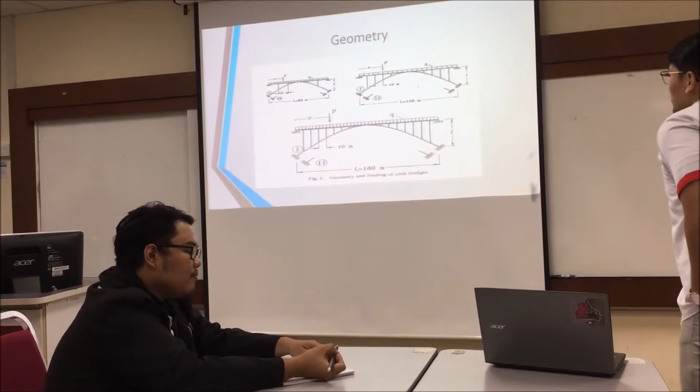Thank you. So I'm going to proceed with the geometry. The notation and loading of the arch bridge structural model considered are illustrated in this figure. The bridge is symmetric and is composed of three major structures: the deck girder, arch rib, and the vertical post.

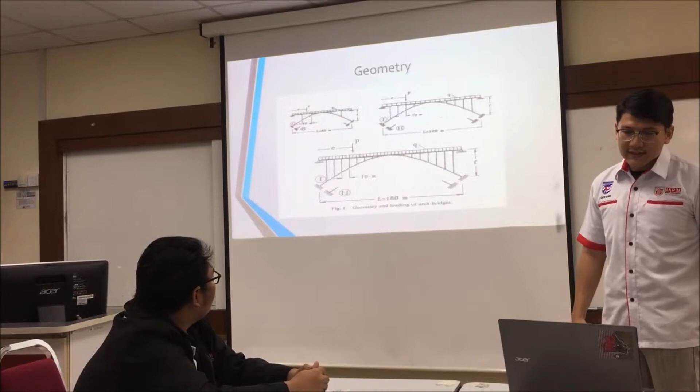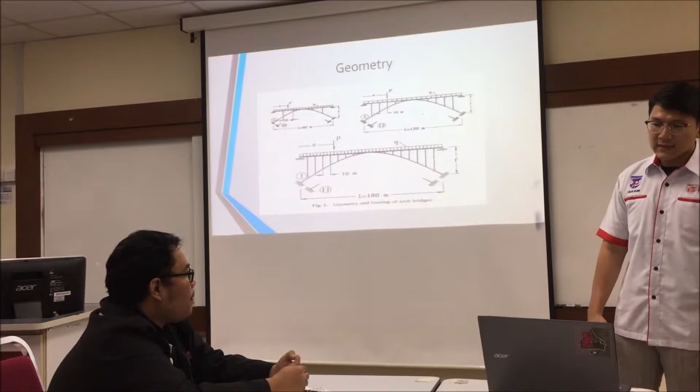The deck girder has a constant double-T cross section. The arch rib has a circular or parabolic axial configuration and a constant box-shaped cross section. The rib is pinned in case 1 or fixed in case 2. At the abutment, the deck girder and the arch rib are rigidly connected at the crown, thus there are no axial forces on the deck. The posts are located every 10 meters and pinned with constant cross section.

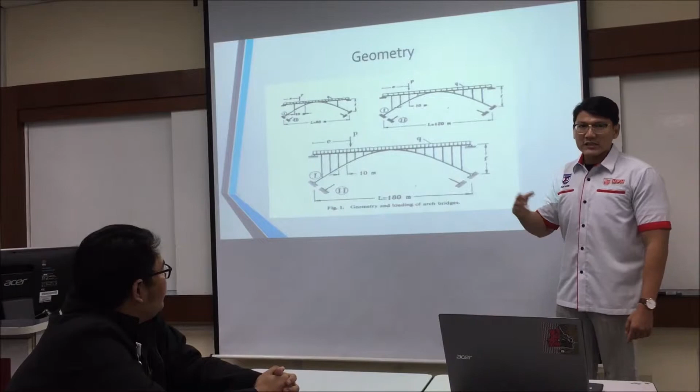As you can see, this is the deck girder, this one is the vertical post, and this one is the arch. One of my engineers will explain how and when the buckling will happen. So without further ado, we'll invite my assistant engineer.

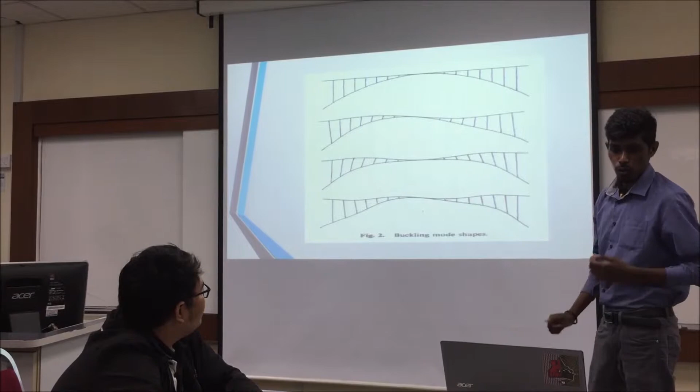Thank you, sir. So let's see - this is based on the mathematical formulation of section 2 and its computer implementation. The critical loads for various values of the considered parameter are computed. The two lowest critical loads and their corresponding mode shapes are found, which we can see.

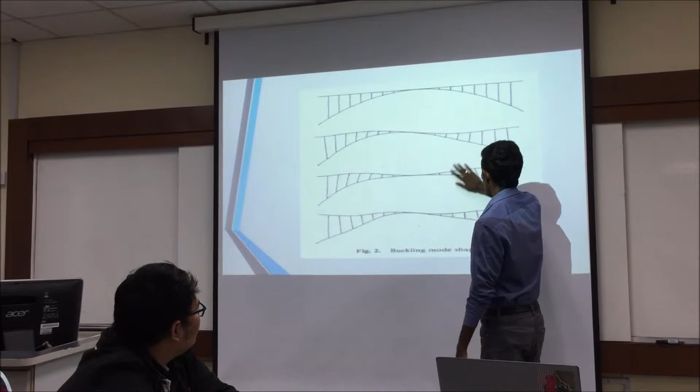This one is the undeflected bridge. Then here, all this is because of the buckling effect. So what is buckling? I'm going to explain it after this.

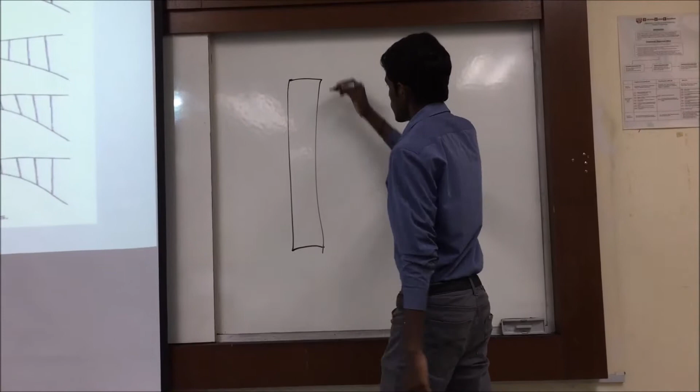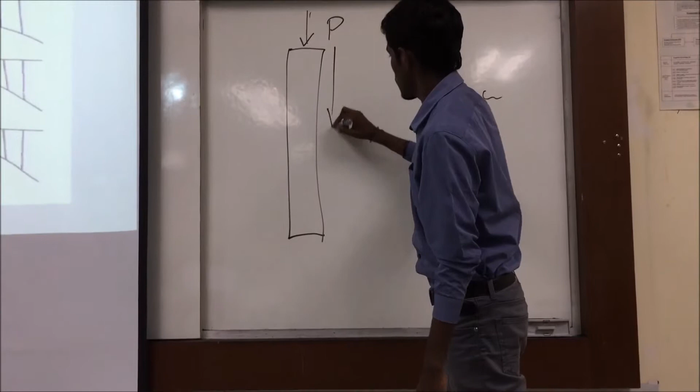First, this is an example of a structure. Then you can see here there's one load, which is axial load. Buckling happens because of a load experienced by the structure parallel to the structure - this is called axial force. Then the buckling effect brings the shape like this.

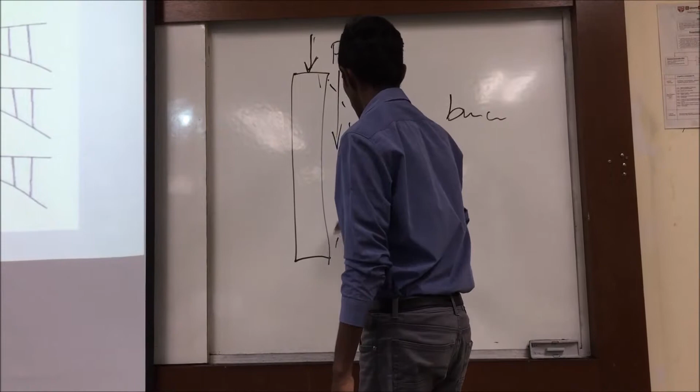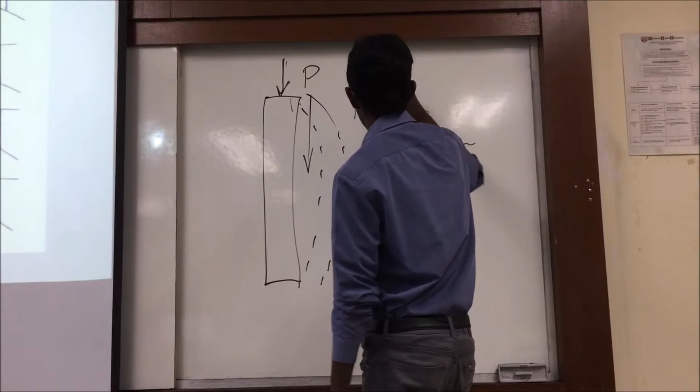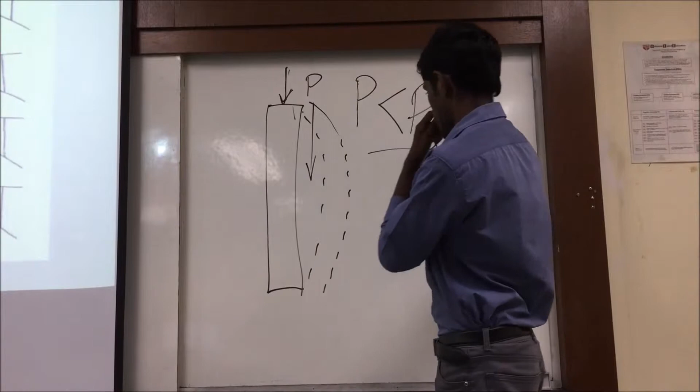So for our structure to be stable, our axial force shouldn't be more than the P critical. We have a formula to calculate this: P critical equals pi squared times E times I, over L squared, where E is Young's modulus and I is moment of inertia.

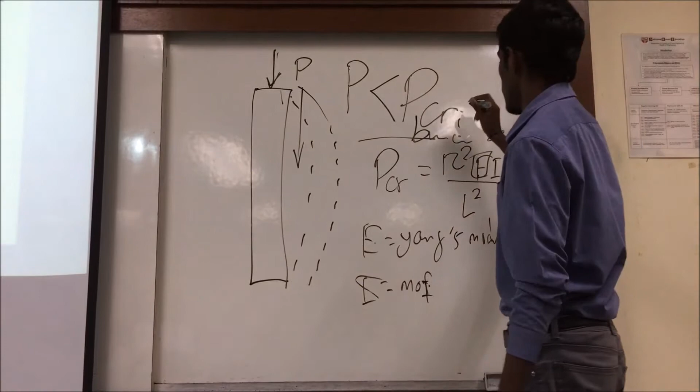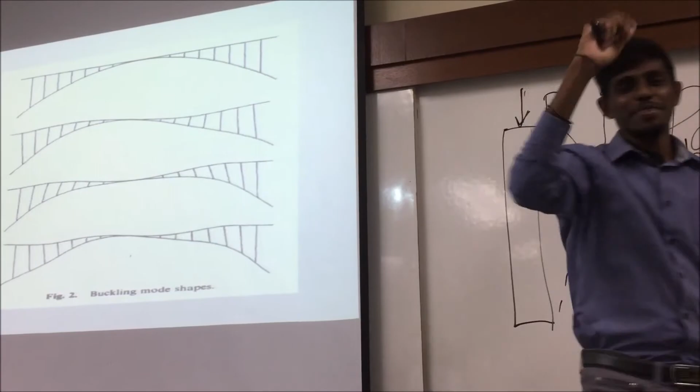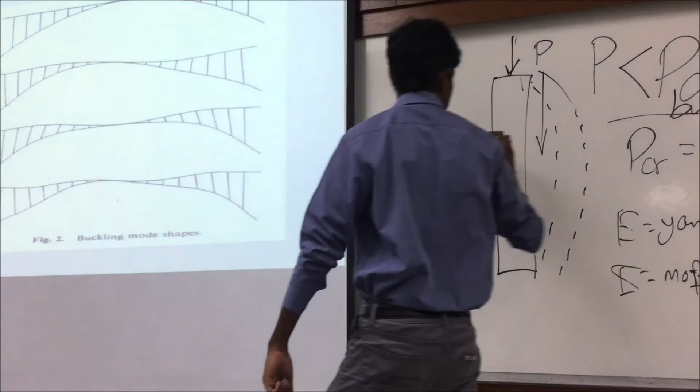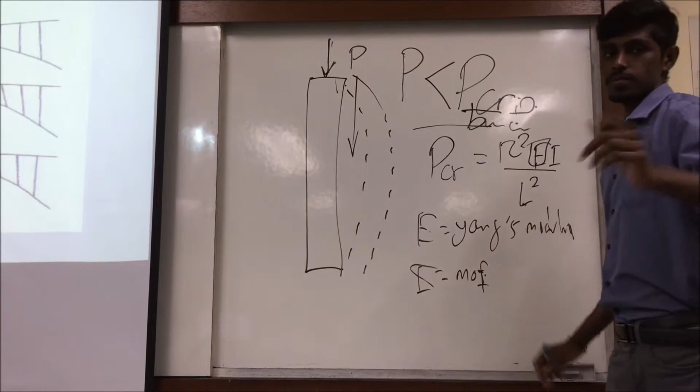So I think our team has analyzed it, that our structure is very suitable for building a bridge at the Sri Tumbangan. Yeah, then I pass it to Mr. Rashran.

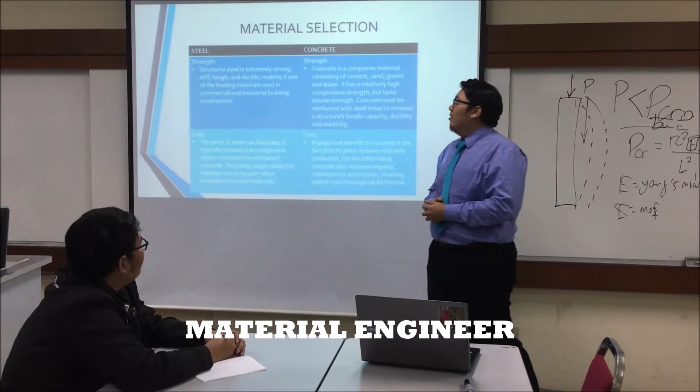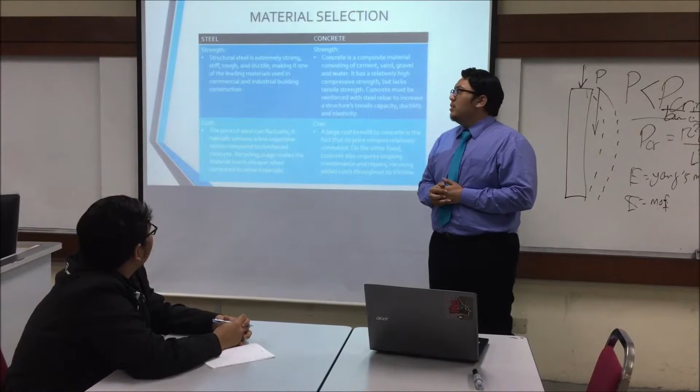Okay, for the next section is material selection. As you can see, we have compared two types of material. The first material is steel, and the second material is concrete. Concrete is a composite material that consists of cement, sand, gravel, and water.

It has a relatively high compressive strength but lacks tensile strength. Concrete must be reinforced with steel rebar to increase a structure's tensile capacity, ductility, and elasticity. For steel, structural steel is extremely strong, stiff, tough, and ductile, making it one of the leading materials used in commercial and industrial building construction.

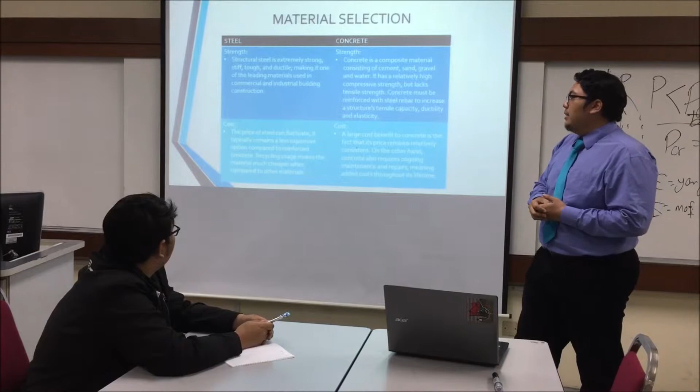So this is one of the factors why we choose steel as our material, because in terms of strength, steel has the advantage. And for the cost, the price of steel can fluctuate, but it typically remains a less expensive option compared to reinforced concrete. Recycling usage makes the material much cheaper compared to other materials.

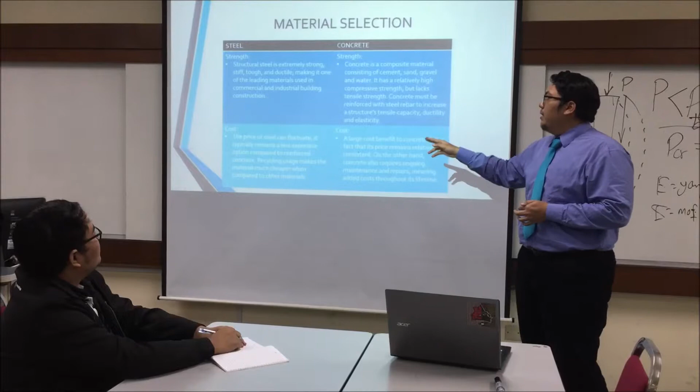And for concrete, there is a large cost benefit in the fact that its price remains relatively consistent. On the other hand, concrete also requires ongoing maintenance and repairs, meaning added costs show up over its lifetime. So steel is cheaper, but concrete's cost is stable, though it has additional cost with maintenance throughout its lifetime. Okay, I think that's all for the material selection. I will pass back to Mr. Hussain.

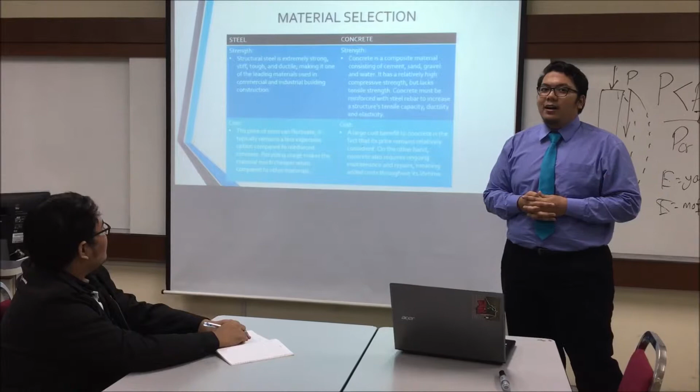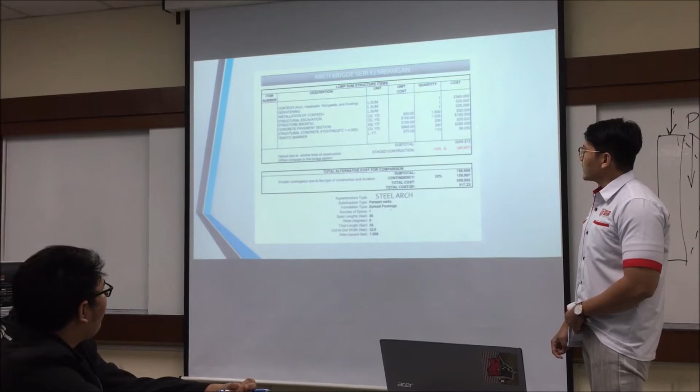Structure backfill about 1,500, costing us about 100 ringgit, with a full cost of about 150,000 ringgit. Concrete pavement section costs 100 ringgit, with a quantity of about 206, costing us about 20,622 ringgit. Structure concrete, 800 with a quantity of 350, costs us about 280,000 ringgit. Lastly, the traffic barrier is 75 ringgit with a quantity of 110, costing about 8,250 ringgit.

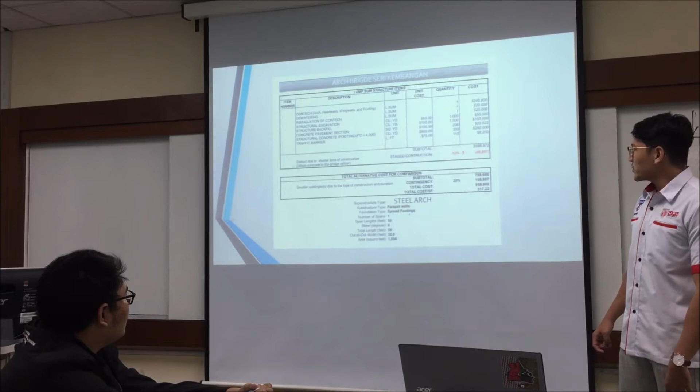So at this stage of construction, the company needs to pay us 90% and keep 10% for a specific period, about 10 or 5 years. The subtotal is 799,985 ringgit Malaysia, and the contingency is 159,997 ringgit Malaysia. The total cost for this project is 959,982 ringgit Malaysia. So that's from us, and I will give back to my companion, Mr. Tak.

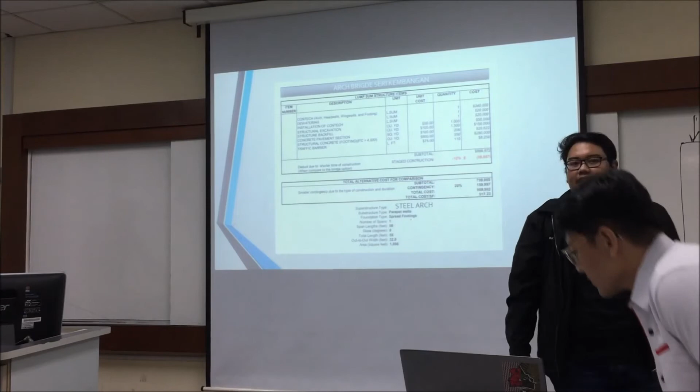You may proceed to the next slide. Thank you, Mr. Kushari, for the cost handling. Pause.

To conclude our presentation, the alternatives proposed here have been carefully studied to determine the most functional and cost-effective structure at the proposed bridge location, with consideration given to constructability, maintenance, cost, and aesthetics. The overfill steel arch bridge structure is preferred because it minimizes the duration of construction and meets the stage construction requirement. It is also the most cost-effective solution, requiring minimal maintenance throughout the life of the structure. Finally, this type of structure will be aesthetically pleasing and blend in well with the natural surroundings.